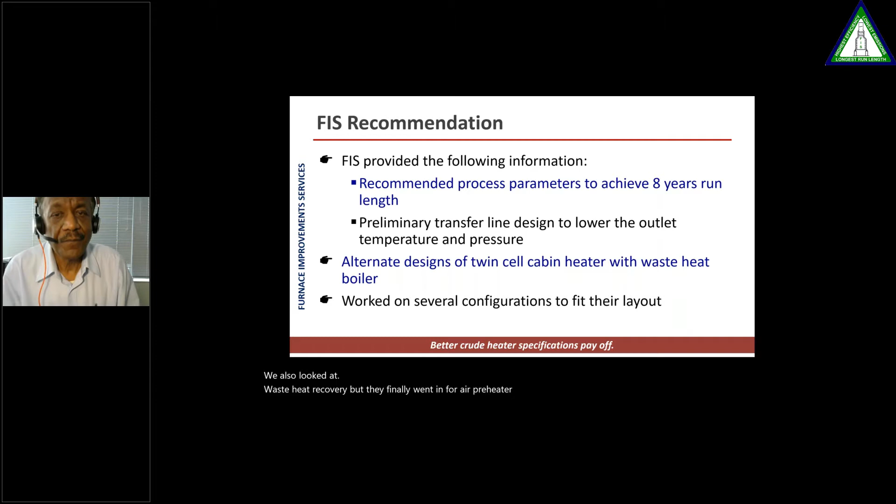So what did we do? We just provided simple features, and these are some of the salient features I'm trying to show you. Average radiant heat flux, we used 10,000 BTUs. We used a 5-inch coil, nested coil. We used 66 foot of tube length to get a heater height to width to length ratio of 1:2:5. And we put burners every 3 to 4 feet. So that is all.

And if you see, all these recommendations are very simple recommendations, nothing out of the ordinary, but it's a combination of all these parameters to get run length. The cost paid by the client for this reliable design was about 10% more.

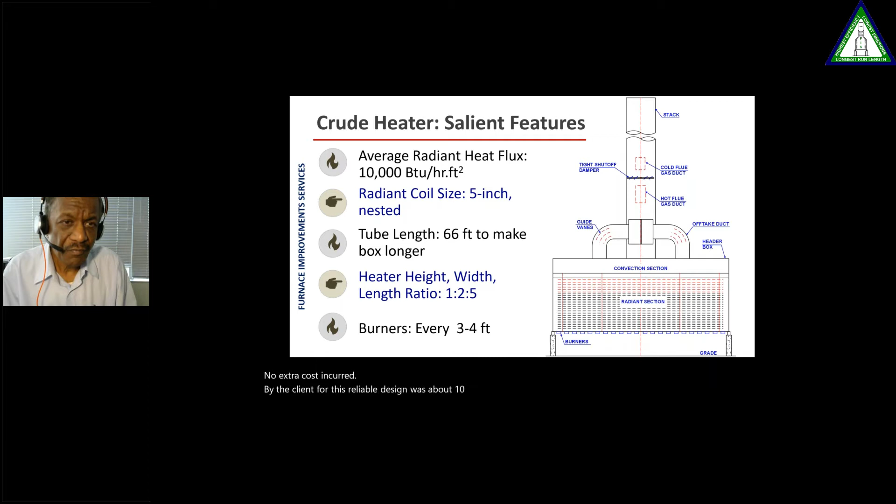The client also went for 2 single cell heaters and combined them with a common air feed system. The logic was that if they ever have to decoke their heater, I mean, they never had to decoke it, but if they have to decoke one heater, they can always do that independently. So they went in for 2 heaters with a common air feeding system, and this is the basic sketch.

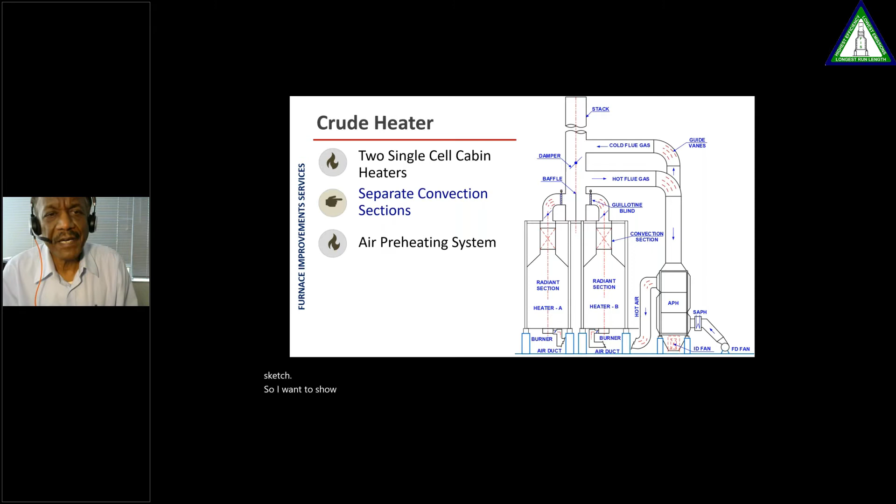So I want to show you 2 comparisons. I want to show you first the design which was put up in that first refinery, and that heater happened to have the same size, and it was developed by the licensor. This heater had 12,000 flux, a mass velocity of 282, coil size of 6-inch, and other parameters I have listed, heat release per burner. And we calculate a coking index of 30 over here.

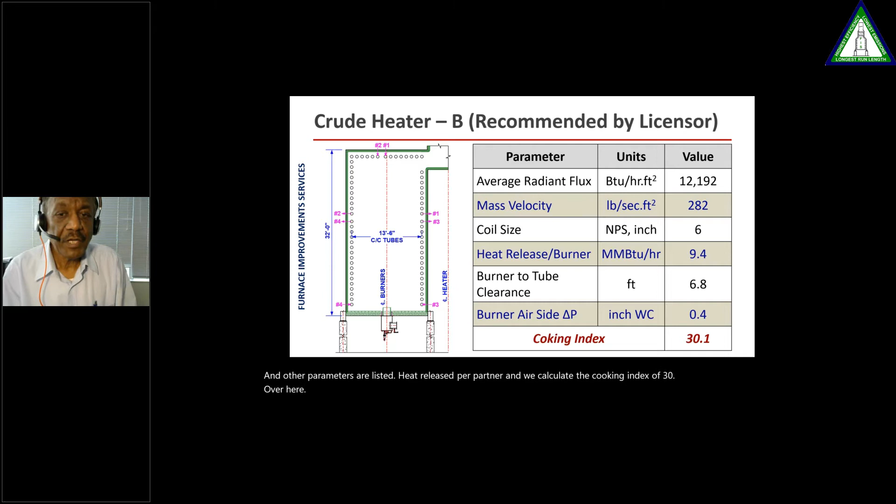And if you look at our design, it is not very different. It's just a cabin. We used 10,000 flux. We used a mass velocity of 357, coil size of 5. We used 5 million BTU burners. And our coking index is coming out to be 8.7. So if you look at this, our heater is about 3.5 times more reliable than the design given by the licensor.

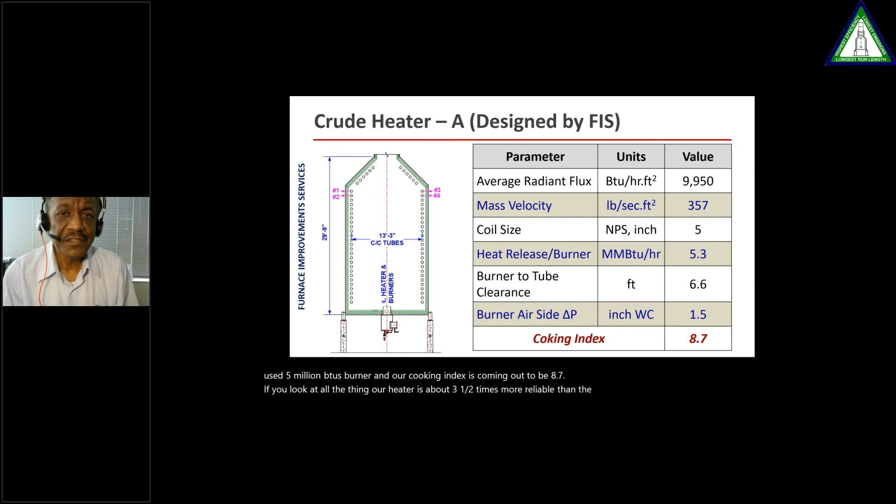And if you look at the cost, I have given you the breakup over here, we are looking at only about 10% or 15% more cost. So will you spend 10% more to buy 3 times more reliability and run length? That's the question you need to pose. So basically, that's where the biggest difference is. And I think a reliable heater will serve you for a long time.

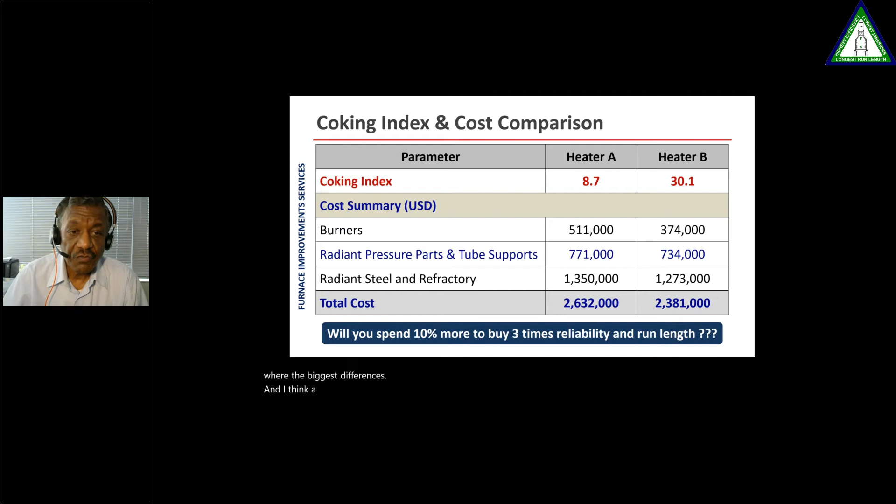We are coming to a close, so I just want to talk about one case over here. So this is a heater, crude heater again with 200 million BTUs heat duty. The client shifted to shale crudes and started experiencing very short run lengths. They started injecting antifoulants, costing millions of dollars every year. The client contacted us and asked for our help.

We did an engineering study, and we looked at the operating data and told him that the upper 1/3 of the heater, which you see over here in yellow, was receiving 40% of the total heat, and the bottom was receiving only 25% of the total heat. So there was a heat distribution mismatch in this heater. And the situation was so bad that they were decoking it every 3 months. And they were also putting antifoulant, which was costing them millions of dollars per year.

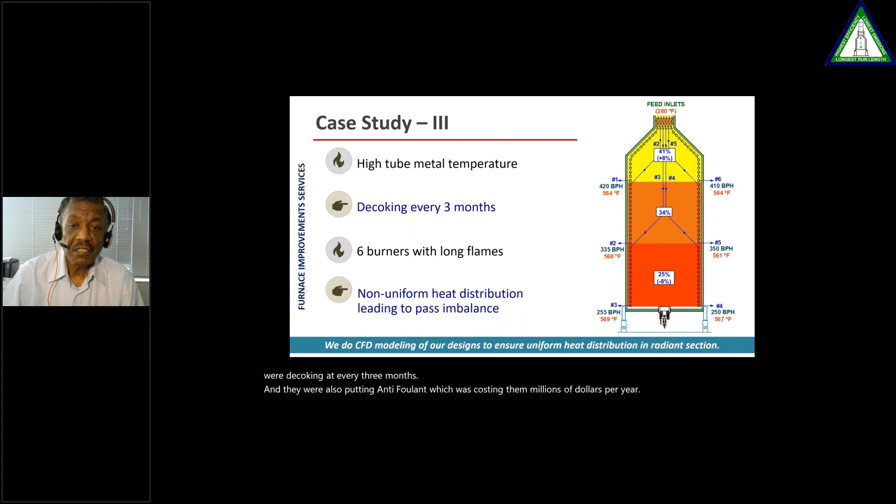So we looked at it and we said, we can help you. We can work with you. So we gave them a lot of recommendations, again, both on the coil side and fire side. Fire side, we said, hey, we will put small burners instead of a large burner.

So we ended up putting small burners, ultra low NOx burners with reduced flame length. It reduced the tube metal temperatures, and it improved the run length by 8 times. That means from 3 months, we went to 2 years.

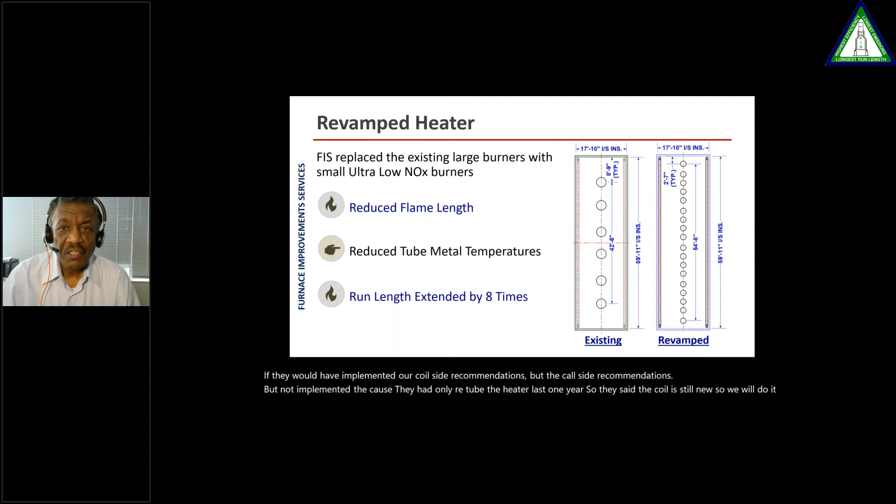Now, we could have gone for more if they would have implemented our coil side recommendations, but the coil side recommendations were not implemented because they had only retubed the heater last 1 year. So they said the coil is still new, so we will do it in future. But that's what I want to show you over here.

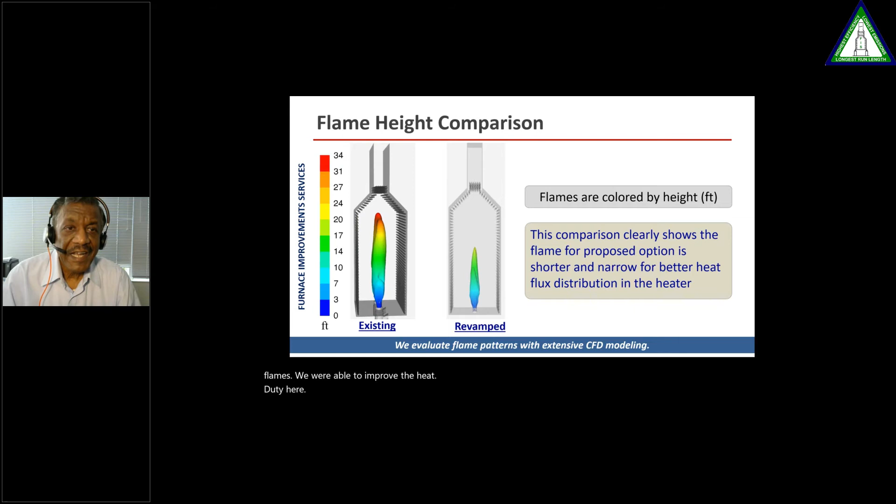You can see that we did the CFD modeling. This is before and this is afterwards. And you can see by having shorter, narrow flames, we were able to improve the heat duty. And if you look at the coking index, we just did the comparison of coking index, and you will see the process parameters have not changed because we did not do any process modifications.

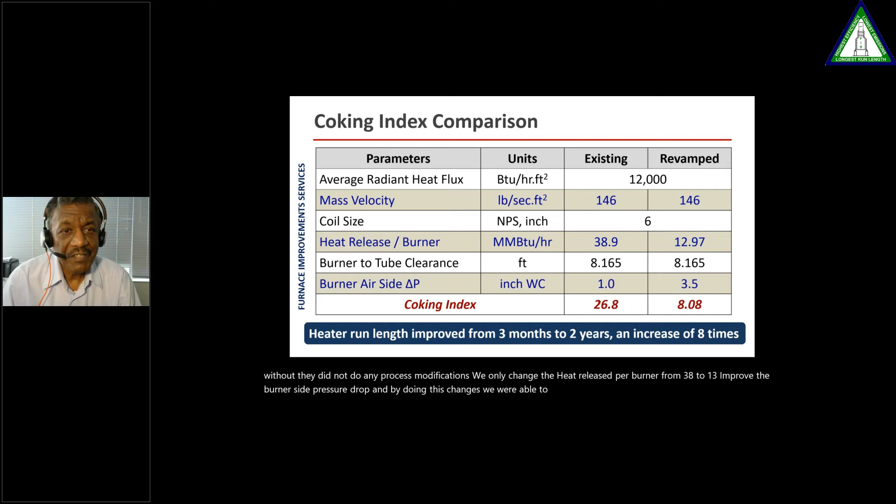We only changed the heat release per burner from 38 to 13, improved the burner side pressure drop, and by doing these changes, we were able to reduce the coking rate by a factor of 3. Now, our calculation is showing a factor of 3, but actually it was a factor of 8. So you can see some of these simple modifications can really improve the run length.

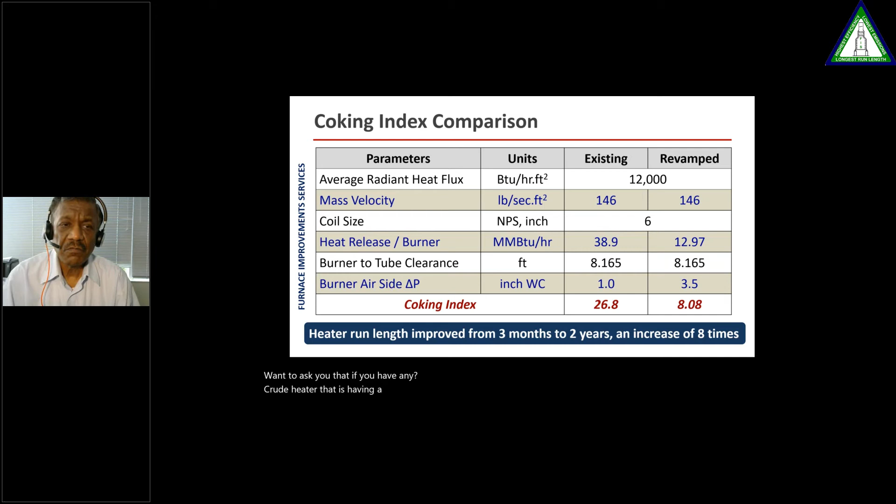I do want to have another poll, if you can let me do that. So a question is, what is the typical run length of your crude heater? So if you can answer back, that will be very nice. We can get a little better idea of the run length. So please answer if it is less than 2 years, if it is between 2 to 3 years, between 3 to 5 years. So please get back and I will share the results with you of this poll.

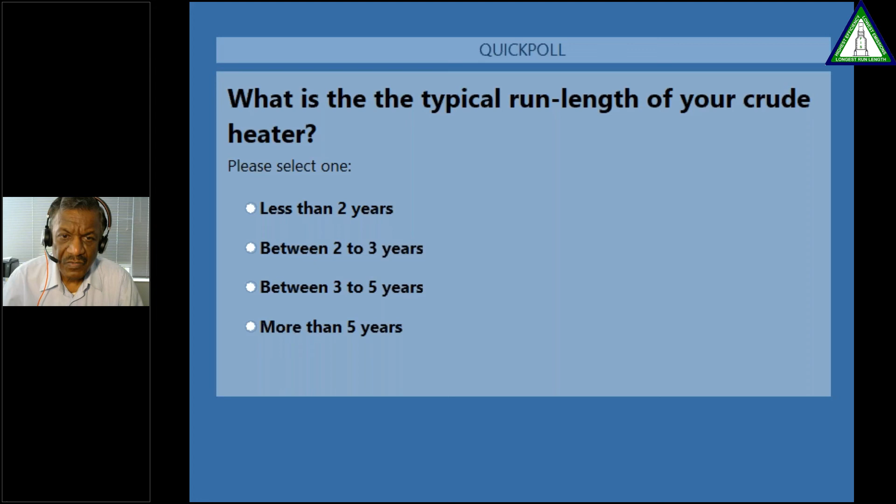So I'm closing the polls, and the results are that 33% of the audience has run length between 2 to 3 years, and they are definitely a candidate for improving the run length. 44% have between 3 to 5 years. We can improve the run length there. 22% have more than 5 years. I think they're running their heater very nice. So thank you very much.

I will go to questions now. And if you have any questions, please. So I have a question from John Roberts. With the increase in crude feed rate, will the coking index be proportionately rising?

John, good question. Now, when you increase the crude feed rate, the mass velocity goes up. So it does have a good effect. But at the same time, the flux also goes up, and the firing rate will go up. So if you increase the crude feed rate, the coking index will go up, assuming that with the increase in crude feed rate, your firing rate is also going to go up.

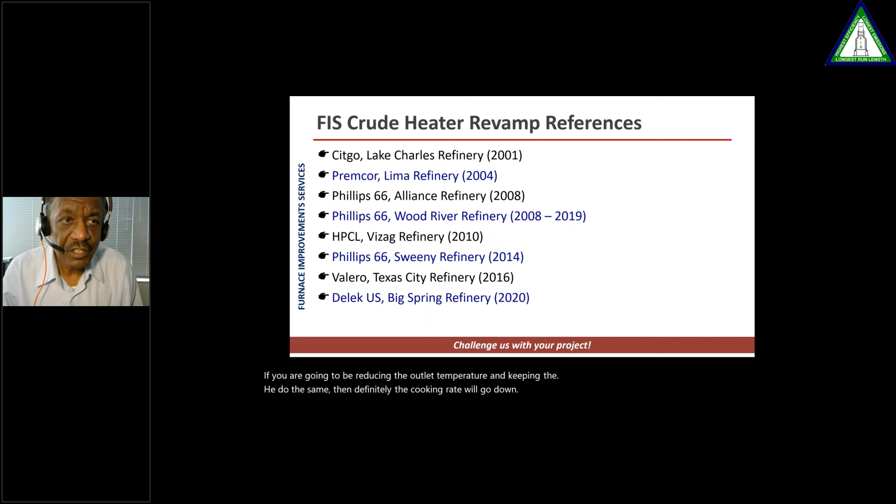I mean, if you are going to be reducing the outlet temperature and keeping the heat duty same, then definitely the coking rate will go down. Any other questions we have?